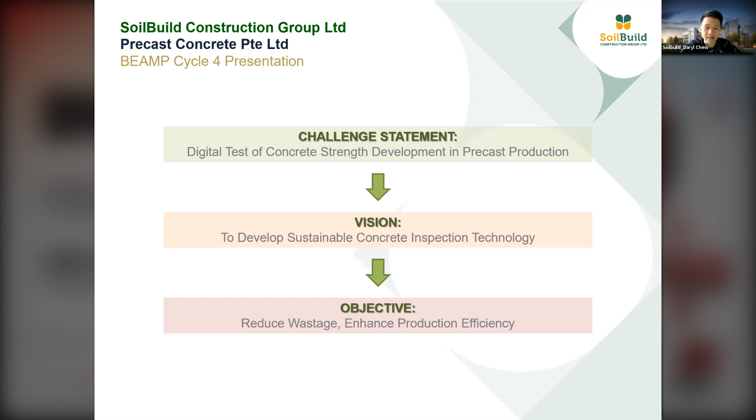A little background on where I come from: this solution is meant for the prefabrication division of SoilBuild Group, namely Precast Concrete Private Limited. Under Precast Concrete, we own what we call the ICPH, or Integrated Construction and Prefabrication Hub. In this ICPH, the way we make our precast components is based on a just-in-time manufacturing principle, meaning our design is done on a BIM modeling tool, with digital files being transmitted throughout the entire life process of the prefabrication process.

There is one area which I circled, which is actually the concreting process of this prefabrication system. As part of this concreting process, there's a need for us to measure the concrete strength development of our precast components. Now how do we do it?

Conventionally, you use a cube mold as shown in the picture, and then pour concrete into it. You let it cure, and probably after a good 12 hours, or depending on the number of days you want to test it for, you'll have your casted cubes. You also at times place it inside a curing tank. How do you then determine the concrete strength eventually? You put it through a compressive test machine.

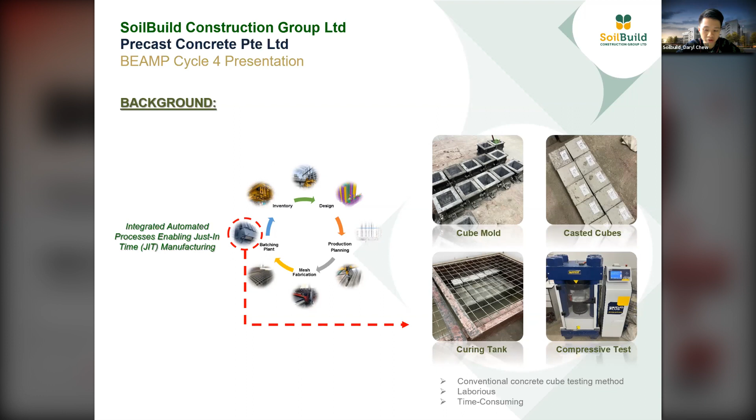All said and done, this is the conventional way of doing the concrete cube testing method to ascertain either your early age strength gain or your later age strength gain. But in doing so, it is actually very laborious. You will need labor to come in to set up the cube mold, to cure, to pour the concrete, to crush the concrete as well. And it is very time consuming.

So these are the three main opportunity areas that we have identified.

First of all, I think we are looking, in comparison to the conventional testing method, at a real-time strength development monitoring system. Why do we need this? Because in a plant like the ICPH, we produce our components in a just-in-time manner. If you can ascertain the early age strength accurately in real time, then you are able to accurately demold it earlier. So it gives you greater accuracy in ascertaining the early age strength.

The second opportunity area will be to minimize wastage of materials. Based on our calculation, we could save about 3,600 cubes for one block of HDB alone. So just to paint a picture, on a plant basis, you will need to test your concrete cube strength every 40 meter cube. In every 40 meter cube, the bare minimum is that you will have to test 2 cubes at the demolding strength timing, 2 more cubes at 3 days, 2 more cubes at 28 days, and as a buffer, you produce another 2 more cubes as spare. If you do it on a project basis, then you will expect many more cubes to be casted.

The third area, we are looking for something that has low implementation cost. So we are looking at less than 1% of component raw cost. However, this is subjective, depending on a case-to-case basis. But why we put this in is because we want this solution to be sustainable. In precast and prefabrication, if you were to implement a digital solution that is way too expensive, it may not be feasible in the long run. So something that is cheap to implement, yet highly effective, that's what we're after.

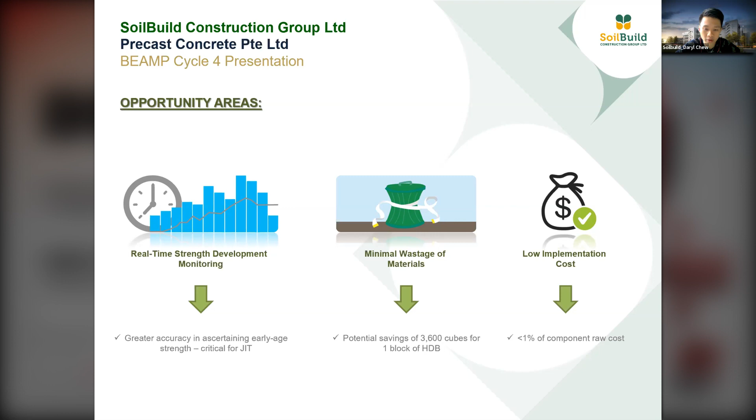So what are the expected outcomes? First of all, very direct: we want to reduce the number of cubes that are being casted, crushed, and tested. At this point in time, to be realistic, we are not looking to entirely replace the current cube testing method, so we will run in parallel, meaning we do the conventional method while having a potential solution to mirror it. Both run concurrently, so with that we expect a 50% reduction in cube testing.

The second outcome will be a 25% increase in casting cycle. Why do we believe this is achievable? Because with the current cube testing method, you tend to test it probably at 12 hours, but if it's past midnight, then you will wait another 6 more hours. There is a time lag there, and you can't expect your workers to be awake 24/7. However, with a real-time strength monitoring system, you are able to measure the strength development at any instantaneous time. So the moment it hits the required demolding strength, you can straight away demold.

That's the rationale. Last but not least, we hope to have an integrated dashboard system to allow stakeholders to view this real-time monitoring, and hopefully in the long run to link this dashboard system to the relevant authorities. For example, if we were to produce components for HDB projects, the HDB team will want access to this dashboard system so that they don't have to rely on conventional methods of sending emails and going through Excel sheets, which is time consuming and labor intensive. So with the integrated dashboard system, we hope to bridge that gap.

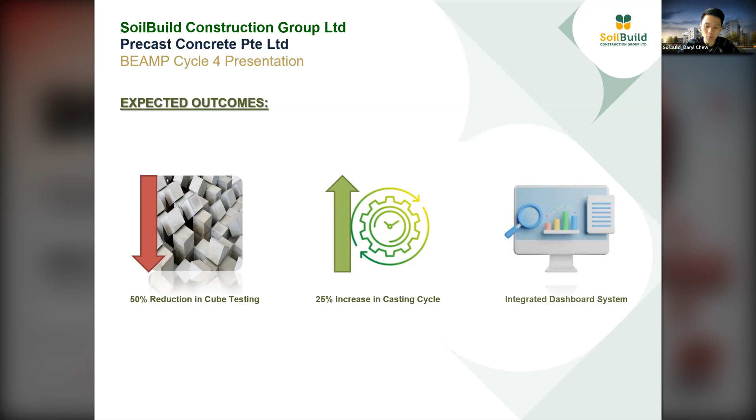So I kept my presentation short and simple. I'm open to any questions that you may have. Thank you, and I'll pass back the time to you, Ebel.

Thank you, Daryl. We do have one question for you. How does this solution to reduce cubes apply with compliances to the government? Will this affect the marketability and feasibility of the innovator solution? I'm just trying to read the question here. Okay, how does this look?

Okay, so I'll answer the first part of the question. In terms of applicability with compliances, this is something we will have to work hand in hand with the local authorities. Why do I say that? Because the current testing method is the conventional way of relying on cube compressive machines—you crush the cubes and then you get the strength out of it. But nothing is stopping you from exploring other methods, say for example the maturity method, which has been implemented overseas.

To cut my answer short, we will have to work with the authorities to prove to them, and I think that's why we want to do a pilot test to try it out on our actual components and do a benchmark comparison with our existing system, to see whether it performs on par or better. If the solution proves to work better, we'll have an easier time convincing the authorities. Such a solution has been implemented overseas, but different contexts and geographical locations have different requirements. How our concrete cures under humidity of more than 80% in Singapore will make a difference too. So all this comes into play.

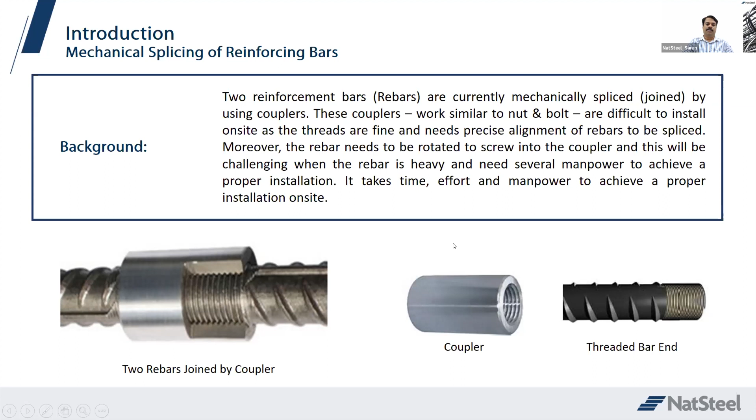So how do we make this? We make the threaded end of the rebar in the factory, and the coupler, which is the internally threaded pipe, is normally a CNC-made component, usually imported. We make the bar end thread by cold forging: we cut a piece of bar and then cold forge it to enlarge the ends of the section. Once that's done, we do thread cutting over it. After thread cutting, the diameter of the thread should not be lower than the original diameter of the bar — that's the idea of cold forging, otherwise the failure plane will easily be on the threaded part. So we try to forge it and then do the thread cutting.

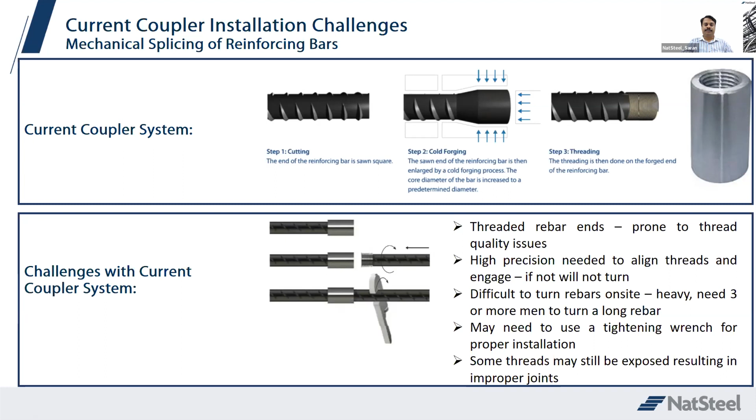So this actually throws up an opportunity to create something much easier to use, faster, and quickly done with less manpower. So we are open to alternate designs of couplers which can satisfy our requirements, especially those key requirements and key challenges listed below. We're also open to other innovative ways of mechanically joining two pieces of rebar. Forget about couplers alone—you can have other methods of joining two pieces of rebar mechanically. So it's like thinking out of the box.

So what are the key requisites or key performance requirements? One of them, and the prime most important, is the ISO 15835 standard. This standard details what the performance requirements of these couplers are. Some of the key performance requirements are tensile strength, meaning that when you do a tensile test on the coupler joint, the bar is expected to fail, not the coupler. So the joint should be stronger than the original rebar itself.

And of course we have these ductility classes in Singapore, so a certain amount of ductility behavior is expected from the coupler—not to be very hard or very soft, but some ductility is expected. The most stringent requirement is the last one, which is slip—meaning that after the joint is made, it should not slip beyond certain values. These are generally very stringent, in the order of less than 10 microns. So that's a very stringent requirement on the coupler.

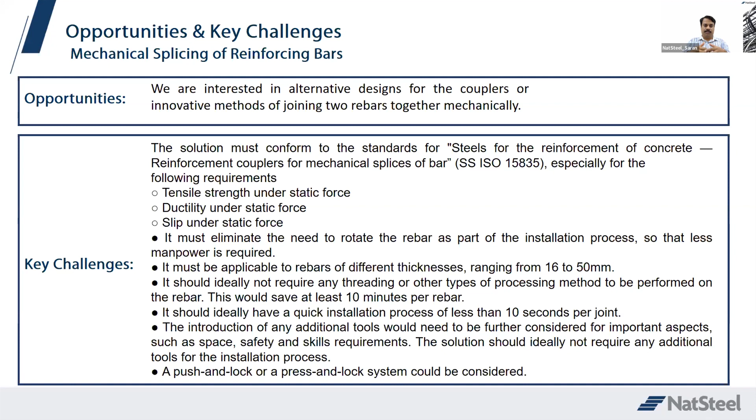So we are ideally looking for, but not limited to, a push-and-lock system. That means you push two pieces of rebar into the coupler and it gets locked up, or you press two pieces of rebar and it gets mechanically spliced. This is not limited to these two systems—it's open, but these are some ideas we're throwing out here.

So then, the expected outcome: yes, we need an innovative out-of-the-box solution if possible, and it must conform to the ISO 15835 performance requirements. And the overall installation time should be about 10 seconds compared to the current 20 minutes.

We could support prospective innovators on the technical aspects of couplers, especially on the ISO standard. We also have an in-house QA lab with tensile test capacity, especially the UTM, so we can provide those machines. If you do not have one, you can use our lab to test your prototypes. That brings me to the end of my short presentation.

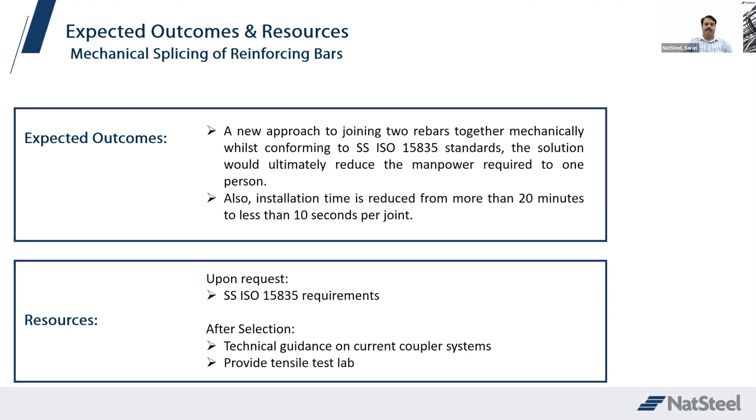Just curious, what are your past attempts looking for solutions, and if there are any, can you share some of the learnings?

We've been trying to find a solution for almost 3 years, and we've come across certain designs used elsewhere, overseas especially. We found that most of them, or all of them, do not conform fully to the ISO, especially on the slip requirement. Tensile, yes, they may pass. AGT, of course, no issue.

Of course, they can achieve a joint in about 10 or 20 seconds, it's possible, but when it comes to performance, they do not perform. So that's why we thought about why not design our own couplers. As you might know, we've been supplying couplers to the Singapore market for over 50 years, almost 1 million couplers a year. It's not a small quantity, so it's worthwhile looking deeper for out-of-the-box solutions.

And so what is your cost consideration? Is there any leeway? How much more expensive can the solution be compared to the traditional coupler?

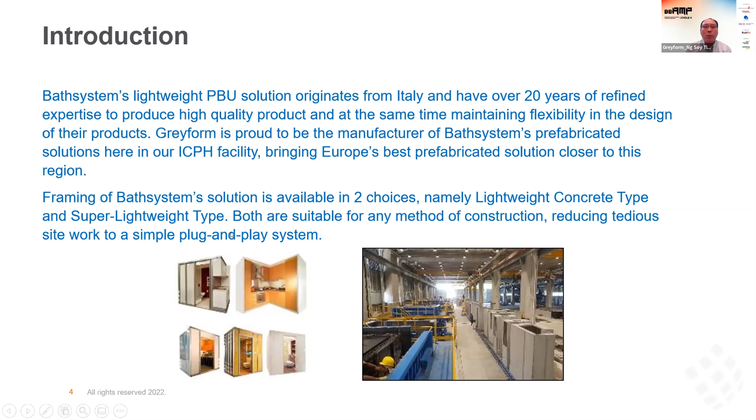Greyform's PBU solution is a lightweight concrete system, related to our Bathsystem in Italy, which has 20 years of production operation. In Greyform, we produce the lightweight concrete in 2 different types: one is lightweight concrete, the other is what we name super lightweight, which uses a steel frame.

Now the PBU we do here is where we assemble all the items in the factory before we deliver to the site to do the installation. So all the fit-out, which is the WC, tiles, marble, shower screen or cabinet, including all the sanitary ware, will be installed in the factory before it's delivered to the construction site for installation.

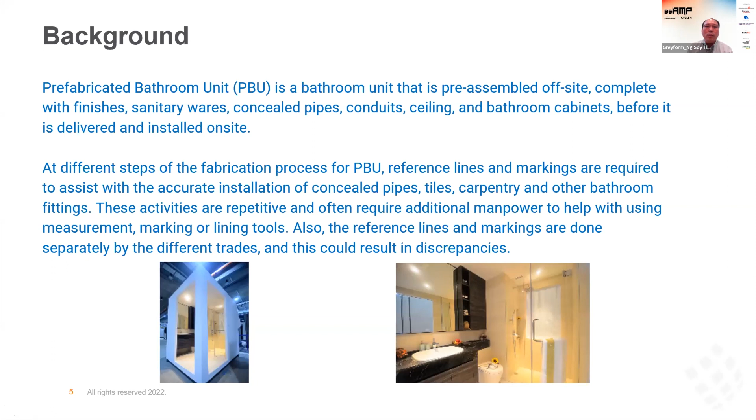So when we do the fabrication of this PBU, there are many stages, and many subcons or trades come into Greyform to do the installation of their items onto our PBU carcass. The first stage is normally from the empty carcass itself, we install the concealed pipe system, etc. And when they do all these things, they do a reference point and do all the marking of where all the bolts and nuts are supposed to be.

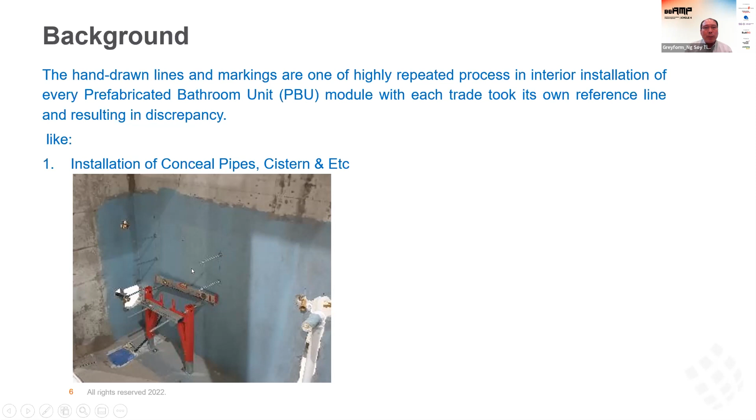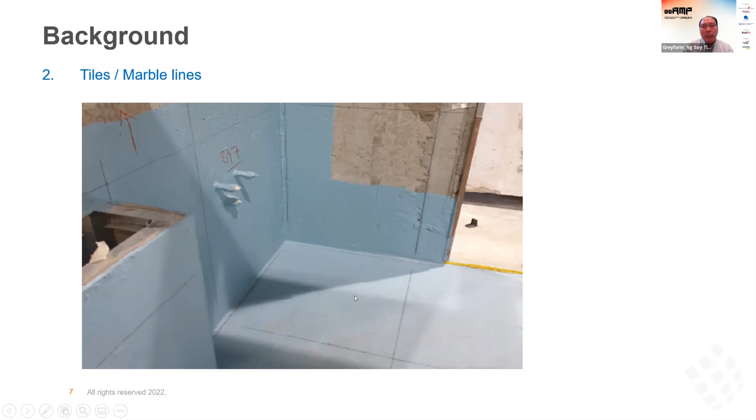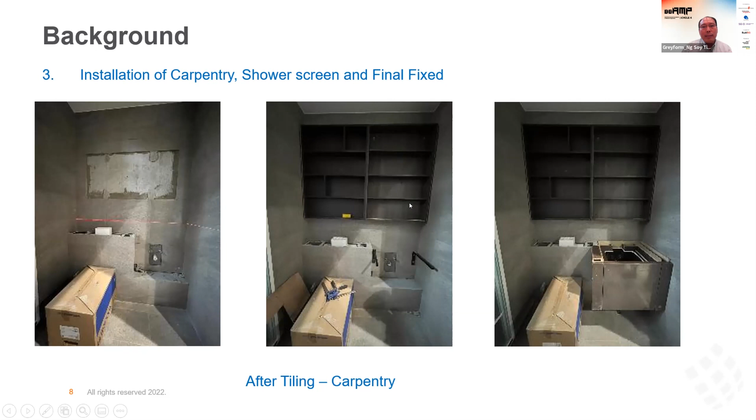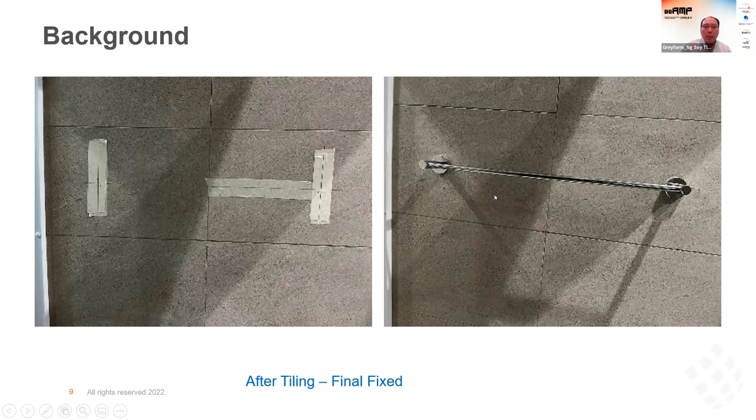Once they put up the structure, we have to do waterproofing to cover up all these things. The second stage of marking is actually just before tiling, where they mark out the tile layout. The third stage is after they put up all the tiles or marble, where cabinets, carpentry need installation, as well as sanitary ware like the towel rail holder or toilet paper holder need to be fixed up.

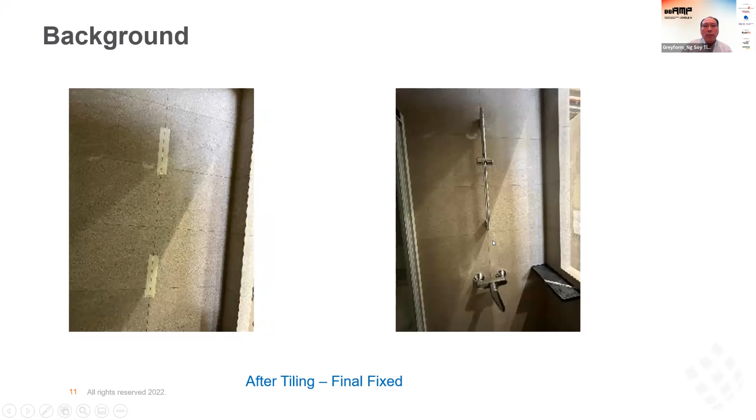Shower rail too. So in actual fact, all this we put as 3 processes. First is after carcass production, where our plumber goes in to do line marking for their systems or concealed items. The second stage is after waterproofing, where our tiling or marble team puts up all the lines. The third stage is after tiling, where we put in carpentry works, paper holders, and towel holders. Each trade comes in with their own reference line and does their own marking according to their required drawings.

A lot of times, each trade, if they don't communicate with each other properly, will have a difference in the reference point, such that some items might be installed wrongly. So our idea is to have a kind of robot system or equipment that comes in to do centralized marking based on our BIM model data.

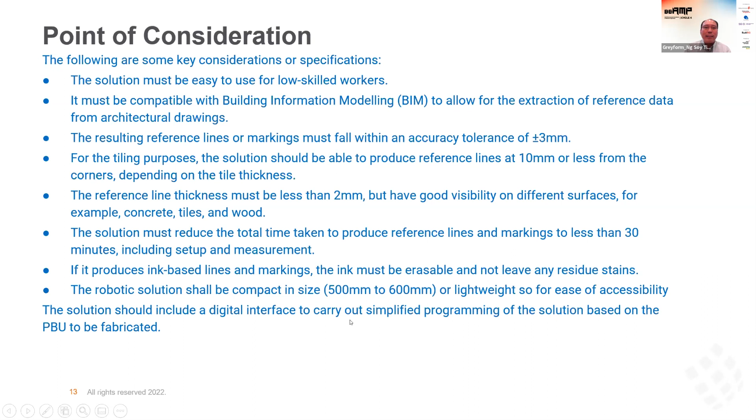So what is our expected outcome for this whole thing? As I mentioned, it should be less than 30 minutes per bathroom unit. And take note it is not a repeatable type, because every bathroom unit has different types and different models, so it has to be high mix, low volume type.

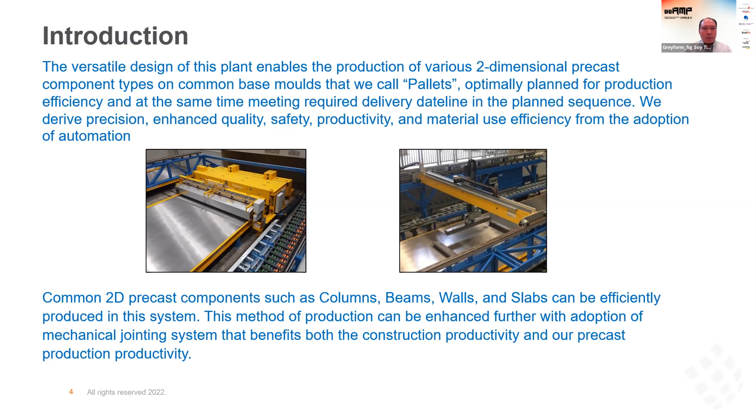Same as before, this is part of the construction process. As mentioned, we have another division which is precast production. Our precast production uses 2D components to do the production, which we name as a pallet. This metal pallet goes round, which we call pallet circulation. The components we produce are basically columns, beams, walls, slabs, using an integrated system where data is transferred over to the production.

At each stage of the casting, we do some kind of quality inspection, basically what we name as the pre-pour inspection and the post-pour inspection. For the pre-pour inspection, we check all the mold, steel reinforcement, lifting hook, splice bar, connector, and any other things that we put in, to ensure everything is correct before we pour in the concrete. For the post-pour, it's to check the shape, size, everything's correct. All this is done through the checklist that we have.

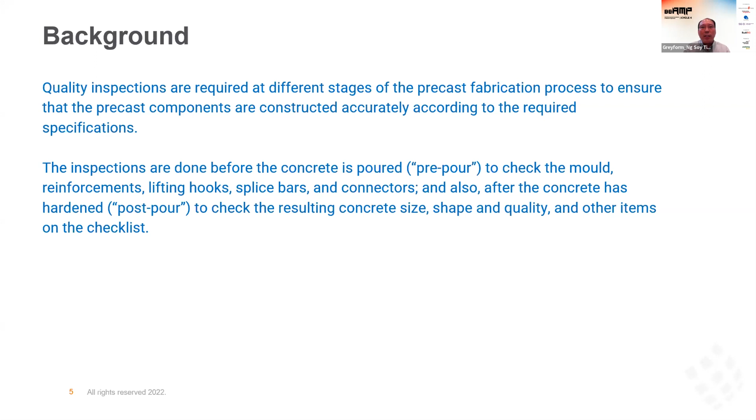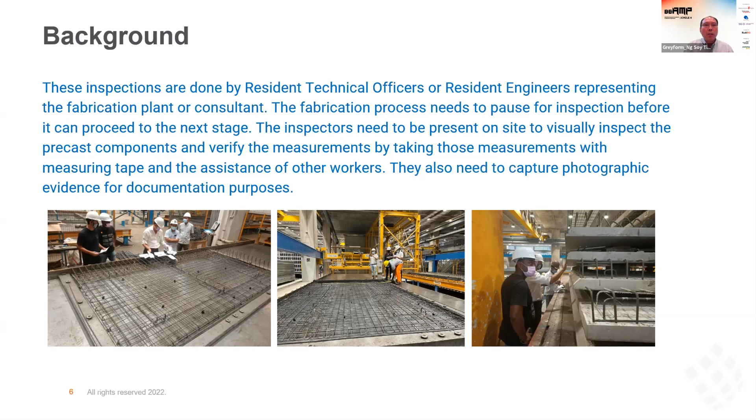So with this, we are actually keen to explore some kind of image or AI technology to do the analysis of all these precast components, using the BIM model data. First, using the BIM model data, after scanning through our precast component, we match it against the BIM model data, with a precision of plus minus 2mm, to identify the total number of rebars that we have - top bar, bottom bar, and any splice or additional cast-in item to be considered.

With all these things put in, we can have one location to put the camera, and as the pallets go around, it will straight away do the scanning and match with the BIM model data and produce the test reports for them. Any items that are out of dimension will prompt up an error so that our people can do the rectification and retest again.

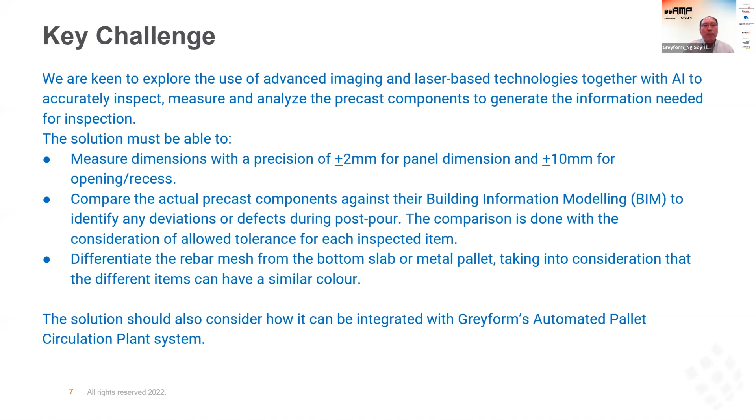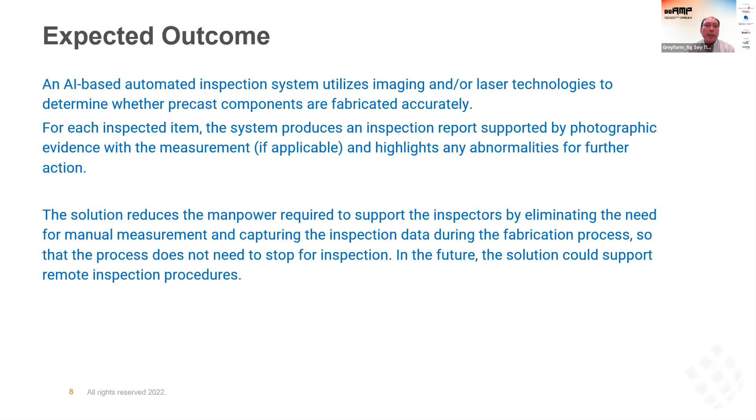So what we expect is a kind of automated inspection system using image or laser technology. With this, we can come up with reports that we can send to the RTO or RE, so that our RTO and RE need not spend all the time traveling from the construction site to our factory to witness this whole process. Yeah, so that's all I have.

We do not have anything right now, but our concept is, since we have the BIM model data, and our workers base on this BIM model data to do all the assembly of the steel reinforcement and then put it into the mold, we hope to have this kind of equipment or AI that can match the result to the BIM model, capturing whatever we've installed into the mold and then matching it with the BIM model data.

Okay, yeah, thanks. So maybe one question from myself: is there any potential restrictions or challenges for installing the sensors on the automated pallet circulation system?

Actually, we also do not know, but what happened is our pallet size itself is about 3 meters or 4 meters in width, and then with a length of 6 meters. So the camera, we are not sure how this whole thing is supposed to be. Perhaps the system integrator can come to Greyform and look at the whole thing before they can come up with something to address that.